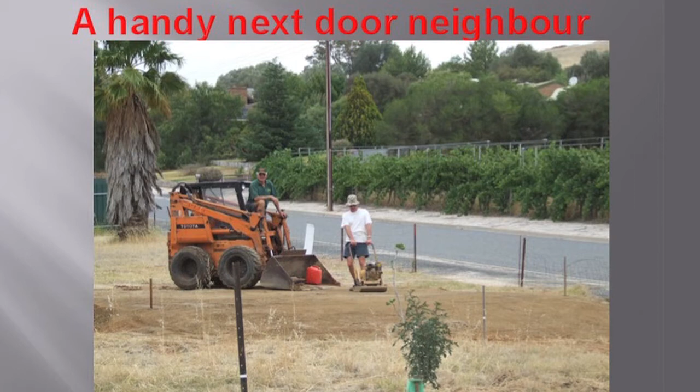I have a really good next door neighbour — that was the guy on the bobcat there, whose block of land it originally was, who we bought it off. And of course I've got a son called Warwick, who just happened to be outside that sign there, near the Central Markets, and sometimes comes to these events.

He's been really, really useful for me — he has given so much of his time, I could never pay him back for it. So if you've got a son it's definitely useful, or a daughter's probably good too, but somebody who's interested in learning, which he is, and it's been good for him too. I'm not saying it's just a one-way street — his knowledge of building has increased over the years, just as probably mine has as well.

So, August 2014, that's pretty much what it looks like at the moment. The only thing different is that flue stack is about one stack higher, because it was a bit close to that gutter.

Now, in the original brief, I knew a little bit about sustainable building. Being interested in permaculture for a long period of time, I had an understanding about north facing, good insulation, collecting water, and things like that. But over the last 10 years working at TAFE, and probably the last 3 or 4, my interest in sustainable building has grown because I teach in this subject as well. And of course, as I'm building at the same time, I'm interested in how things are going to be affected in the build.

It was somewhere in that period of time, probably back in about 2004, that I first read the book by Brenda and Robert Vale about the autonomous house. It's a fairly dry read, not scintillating, not full of colour pictures or anything. It's quite a dry read.

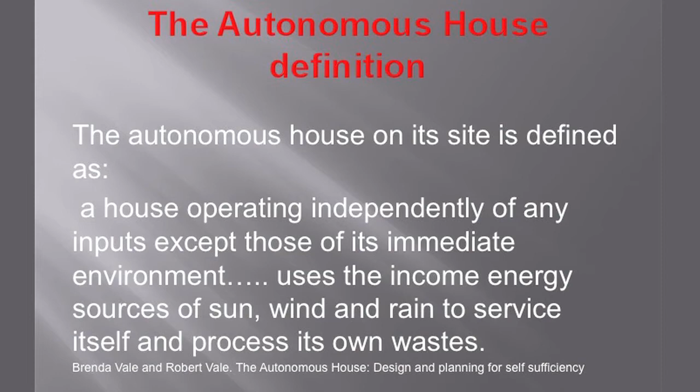But it opened up a new concept which I'd never really thought about. I'd always thought about the house as being sustainable, but when you think about it as autonomous, it's like a living thing that's self-supporting. I enjoy their book, probably more now than I did at the time, but it was a way of thinking about houses I'd never really considered before.

They were practitioners of it as well, both architects, and they built this house in Nottingham so they could see how it worked for them. All the things they were teaching as architects at the university, they put into practice in their own house. By and large, they accomplished pretty much all of what they wanted to do, with a few exceptions, but exceptions are always there for whatever we do.

This block of land that we purchased all those years ago was in Angaston in the Barossa Valley. It's just under 1 acre, about 3,800 square metres all around. When you see the photos, the nice thing is there are hills either side, so you get this extended view and don't really see the roads. It's still in the township, so there's town water and sewage connection there.

Because Penrice Road is the main road, we decided that's our actual address road. We were able to build the house furthest up to the back of the property, which was useful, and the first thing that went up was the shed to store all the stuff. The other thing it allowed us to do was twist it away from the road so we were facing exactly north.

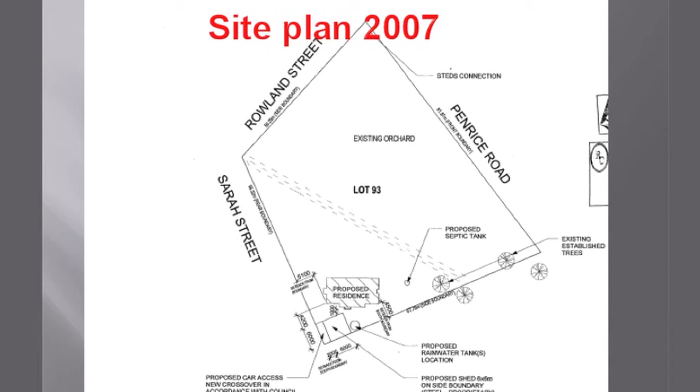If you can do that on any block, then you're off to a good start. By and large, having good orientation will save you much more money than having bad orientation. So that was Nearmap probably about 3 years ago.

Obviously had the roof on, so it might have been four years ago, can't remember now. So when I said that we went to the architect, it wasn't that we hadn't thought about what we wanted to build on this house. We had thought about it, and with me being the artist person, I'd come up with lots of different sketches, and we had a look at them and decided no, it wasn't really any good. Then we'd go back and have another look at another one.

So we came up with this design. Originally it was going to be quite a steep pitched house, and we were looking for a mezzanine area over the top of the 2 bedrooms, because we both had this romantic concept of mezzanine bedrooms. But as you get older and have to lean more, you probably lose that concept out of your drawings.

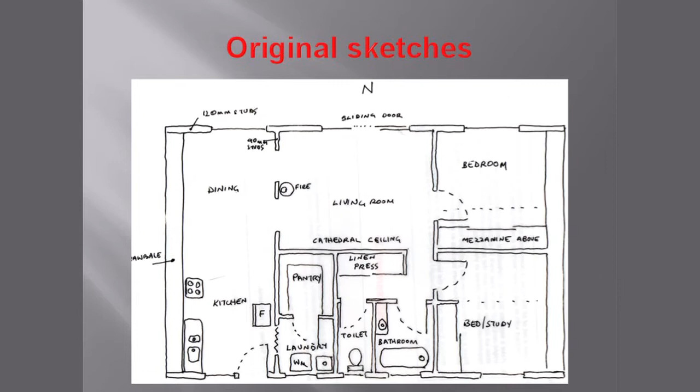But that was kind of what we came up with. It was pretty good. We'd always wanted a composting toilet, so even though it's drawn in there just like a toilet, it was probably always going to be a composting toilet to use. And so in 2004 we went to see the architects and gave them our sketches, and that's what the architect came up with.

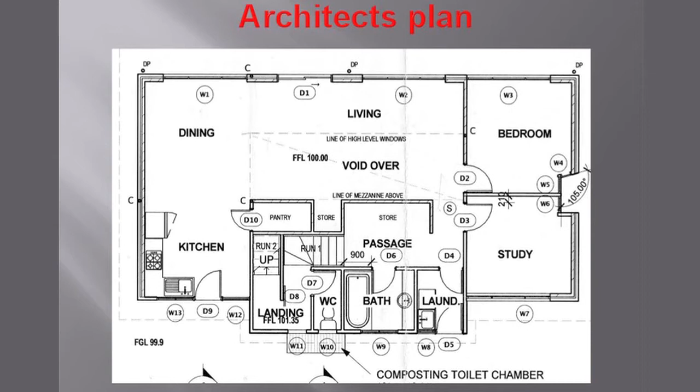Now I'll be honest, it wasn't a love affair with our architects. It wasn't one of those rosy experiences. It was not a long drawn out process, but it was not as fun a process as it could have been, I don't think. I don't know why that was, but it's just how it turned out. So that's why the architect's name is chopped off of that drawing.

Our architect, a well-known practice, had a junior architect do the drawings who came up with the idea of that area with a mezzanine over the top, hence what you see in the photo. Because of that, it opened things up. The composting toilet is on its own mezzanine, which was a good idea. The mezzanine above went from the pokey one under the eaves we were originally looking at to almost a room and a bit up top, which is okay.

It's quite a nice space, quite warm this time of year with the heater on. But by and large it didn't really change a lot from our original plan, just a couple of extra doors. One of the things you can see is the door that was drawn there, which was probably taken off my original drawing. I went over into the dining room instead, because I didn't see much point having the lounge room with another door in it.

So that was the architect's impression of it, with full height windows, which is one of the things we disagreed about in the end. I went for less height windows, which does reduce your solar gain, I won't deny that, but it also allows you to use a whole lot of wall space that you couldn't use otherwise.

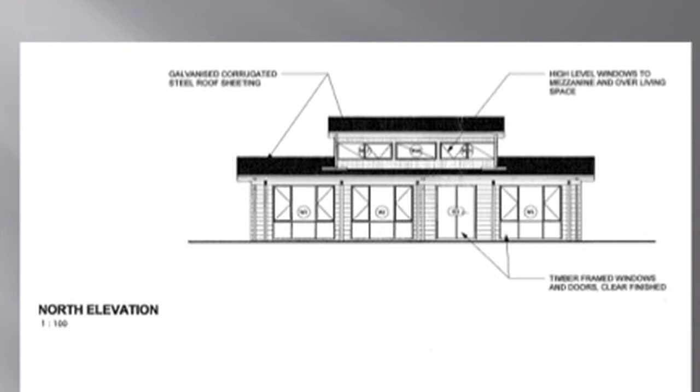Running energy programs on west-facing walls, if you have no windows on it, it just gives you the best scenario. As soon as you put windows in there, your energy rating goes down quite remarkably, even with expensive glass. So that was a cross-section with the composting toilet chamber, just to allow access to it.

So it's a Clivus Multrum size, and the mezzanine there.

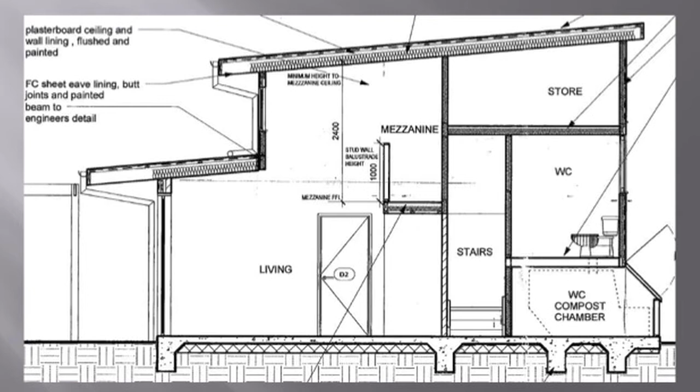So in summary, it's all the things of good passive design: north-facing, no west-facing windows, small windows on the southern side, most of them double glazed, and small on the eastern side with a little inlet alcove there. Good cross ventilation, both low to high and just through the house, because most of our wind is north-south.

We're at the top of a hill here, so where I'm standing there's a quarry right behind me, although you can't actually see it because there's a hill there. It seems to funnel the wind directly through or directly down, so it's really good for that.

And lots of insulation. For wall systems, originally the architect wanted reverse brick veneer, and I was quite happy with that. But then I learned more about reverse brick veneer, and it's good in certain parts of the house and not so good in others. So from a house that was completely reverse brick veneer to start with, it ended up being limited to pretty much the east and west walls, and everything else just got extra insulation.

So the original structure was just standard 90mm pine studs. Then when I decided to negate the brick veneer along those walls, I added another 70mm layer of studs with insulation as well. So insulation-wise it's about R4 in those walls, plus of course the weatherboard and plasterboard add a little bit more.

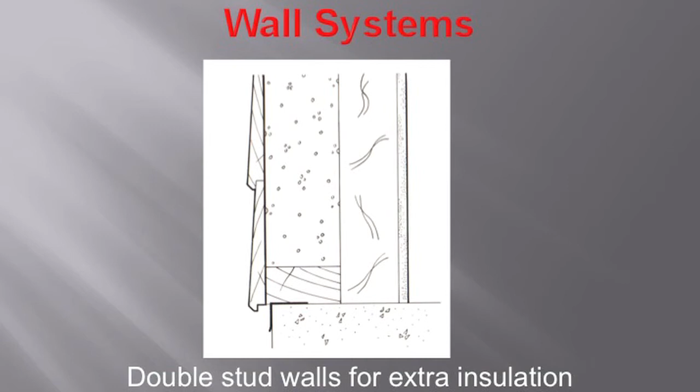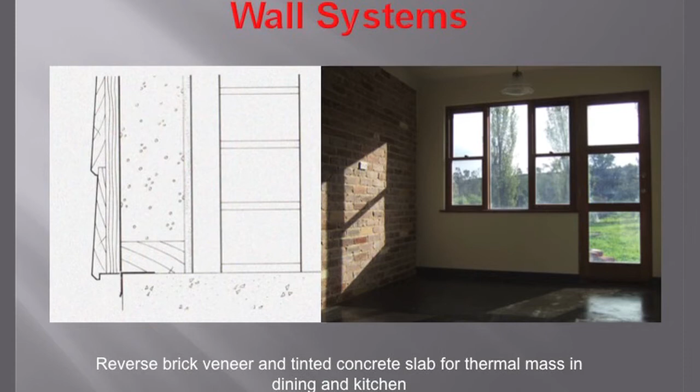And a reverse brick veneer with the concrete slab - that's not quite polished there, just got a bit of linseed oil on it at the moment, but it will be polished over the top. It's a really good absorber of heat for balancing out the temperature in your home. And of course if your slab is tinted it works even better. So when the original pour came, we just had a little bit of black oxide sprinkled over it.

That's the little alcove on the eastern side. As the builder of this house, that was a cursed thing to actually do - so much detailing, trying to get this little 900 by 600 space in there and detail it for the plasterboard.

And there's 2 windows in that space as well, which you can't see from this side. It does give you on that back bedroom, which is on the south side, a little bit of winter sun in the early morning in winter time. So it's probably worth it for that.

Now that was the southern side of the house, but since I took that photo, about a year and a half ago, I've got next door neighbours now who are much quicker at building their house and have almost completed theirs. But they probably didn't have as much fun as I had.

So that's the dining room. We only had the power put on about 4 or 5 weeks ago, which made it kind of habitable, so we've been staying up there on weekends since then. Because one thing composting toilets need is a perpetual fan to make them work, so when you haven't got power, it's pretty hard for that fan to buzz around.

The bathroom's quite small because the toilet's separate, so it was just big enough to get a bath in and a vanity unit, and a novel use of a set of stairs there, a set of steps.

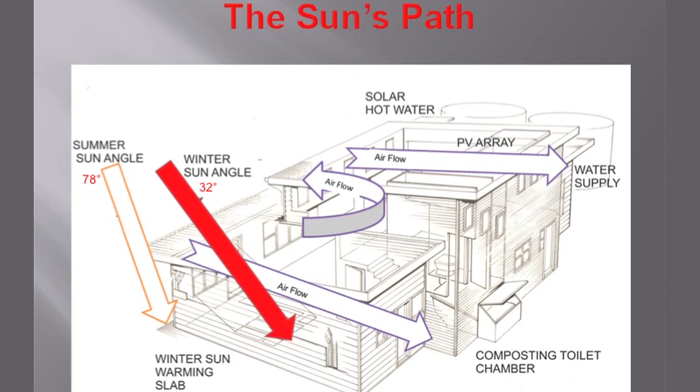But pretty much you can see that I get no summer sun probably until pretty much the equinox is starting to come through the windows.

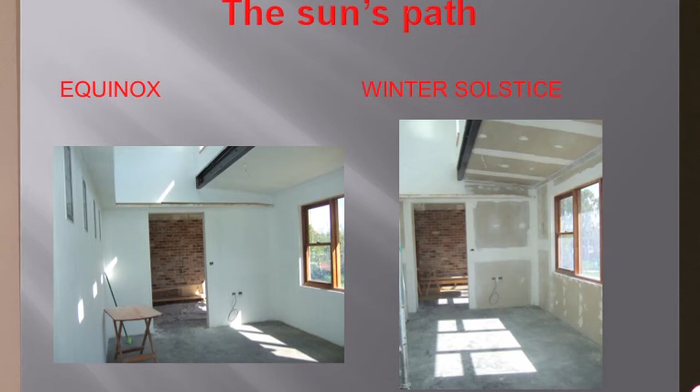So some of the other things about making a house more autonomous is having rainwater. Because we were only up there on weekends, I ended up with concrete rainwater tanks, which were quite expensive and probably not too environmentally friendly, but we've got 45,000 litres altogether. We have mains water to the house, but the rainwater tanks are now plumbed into the house at the moment.

But as part of my permaculture design, I was looking at strategies for getting water into the orchard as well. On the orchard side of the road, it sits probably about half a metre below the road, so there's a fair volume of water that comes through there.

Although we do have a creek that runs through there, it's a stormwater creek, so you can't really capture too much off of that. But I do have a plan for the future for that one.

The swales come into the orchard and recharge the subsoil, and you can see where the green area is in summertime of how much water goes into that.

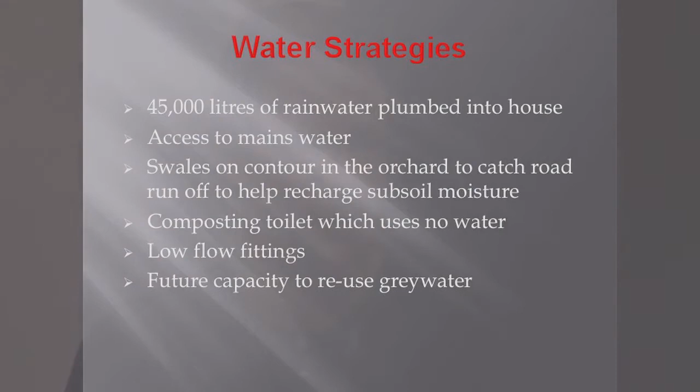And then in the house, composting toilet, which uses no water, and then low flow fittings. One of the compromises getting the composting toilet through the council was that originally I wanted a grey water leach field into the orchard, but they weren't very happy about that. So we agreed to disagree, and I said, well, mainly I'm after the composting toilet. The grey water, you have options of what you want to do with that in the future. So I said, okay, I'll agree to give you the grey water to help your STED system flow down to the sewage farm if you give me okay to have the composting toilet. And I was like, yes, got that one through.

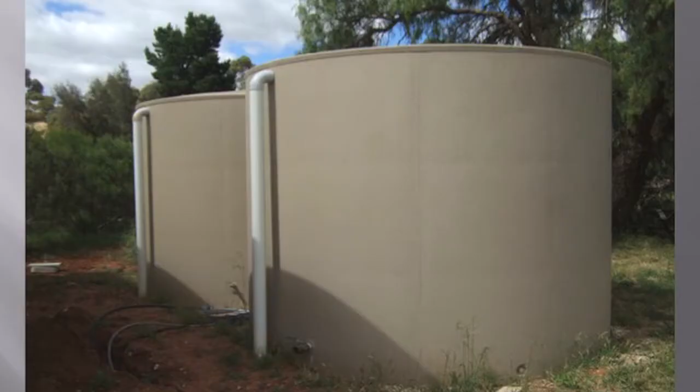And then of course you've got to deal with the Department of Health. They are very pro composting toilets, but you have this kind of back and forth ping pong match between them and the council. But it's in, so there's the water tanks, rain tanks.

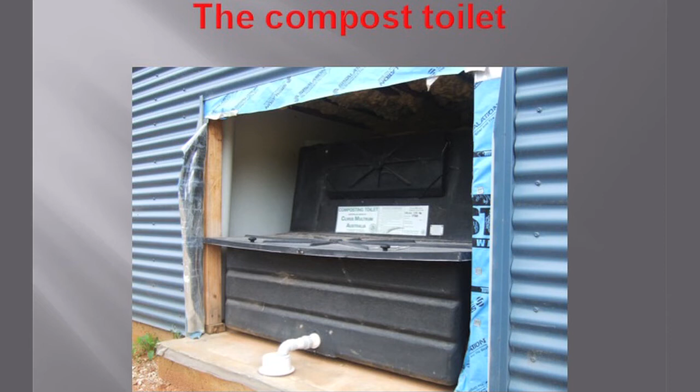That's what the composting toilet looks like in Australia. Some countries use fiberglass, but over here it's more of a plastic, quite thick, quite dense plastic. And it does have an overflow drain just in case you need it into the STED system, common system. That's what it looks like now, they still have to get some flashing on there. That is how they work if you've never seen one before.

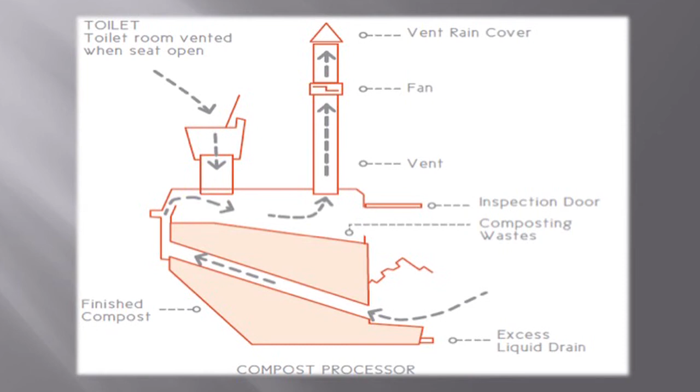Essentially they don't really compost, there's no real heat there. It's filled up, about two thirds of that container is filled up just with leaf mulch and compost. And then all that happens is the human waste feces just dries out on the top. Once it dries out, it doesn't create very much volume at all. In fact, humans are kind of like the worst in regards to volume. You wouldn't be able to fertilise very many gardens with human waste. You're much better off getting a cow or a horse.

But unfortunately, we flush it out to sea with many litres of water, so it looks like we have a big volume of waste. So for the insulation, it was just to building code originally, it was R3.5 or something in the ceiling.

So I went for, and summer and winter is different here, an R4 batt plus a reflective foil, which gives it an extra R2 in summertime, and it doesn't really matter that much in winter because it has to get through the R4 in the first place.

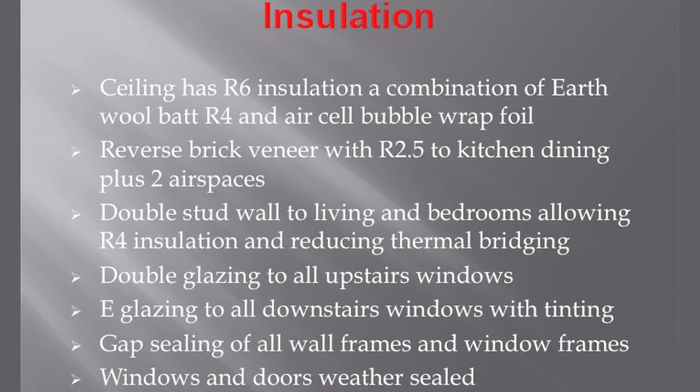The brick veneer walls have got R2.5, and for personal reasons we just decided to go for a spray foam around the whole exterior of the house, and that's worked out quite well. So that reverse brick veneer wall with the red bricks has got two air spaces plus plasterboard in between those two air spaces, plus the brickwork on the inside. Most of the rest of it has just got double studs with no air spaces, which gives an R4 insulation.

One of the things about learning how buildings go, when I first started this, it was double glazing or e-glazing. E-glazing was just relatively new in Australia, and I thought, oh, it's e-glazing, it must be good. So I got e-glazing to all of the downstairs windows and double glazing to all of the upstairs windows. Probably, if I had to do anything again, I probably would be thinking about changing some of that, but that's just how it goes, you're just kind of stuck with it.

And it has got a bit of a tint in the windows as well, so it's probably going to benefit more in summer than in winter. It's not that it's cold in winter, but it's probably coolish. But if climate change keeps going, I'll be winning there.

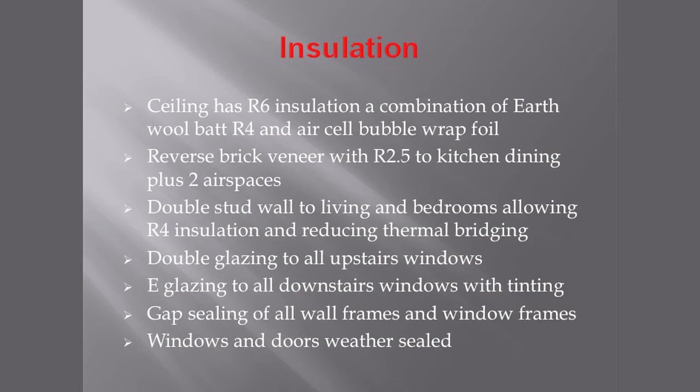One of the things that I got from the passive house movement was the sealing of frames and windows, which we do fairly poorly in Australia. So all of my stud work is sealed to the slab, and all of my windows are sealed to the stud-work, both with house wrap and also seals.

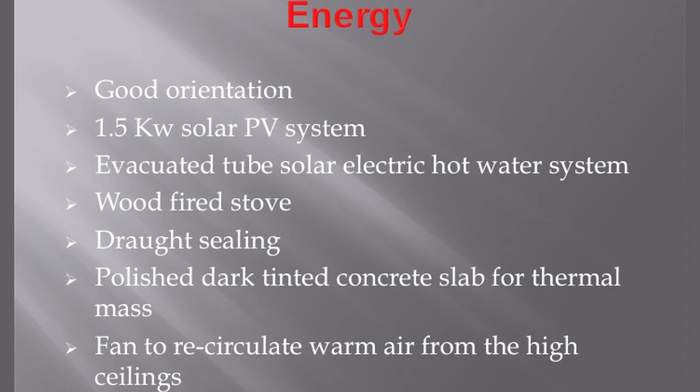So there's not going to be much air movement through that. I did get a 1.5 kilowatt PV system on there, that's on the shed, which you might have noticed - I can't remember whether you can see that or not. And an evacuated tube hot water system from Stratco's. The wood-fired stove was originally going to be part of it, but my plumber talked me out of it, so it isn't - it's just there as a heating and cooking unit.

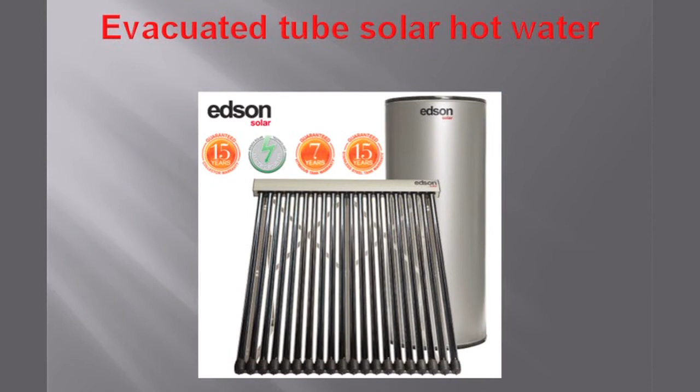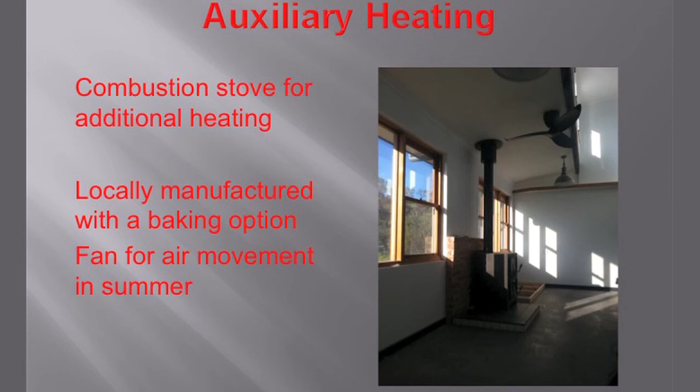So as for the land that surrounds this house, which is why the house kind of came out of the land - the orchard's probably got about 50 fruit trees. We've got this interplanted with leguminous trees such as Tagasaste and some acacia species. We've got vegetable gardens running through the rows, about 1.5 metres wide, running probably about 20 to 30 metres of vegetables.

And there are some swales on the orchard because occasionally you do get really heavy downpours. I was lucky enough to be up there one day when it gave us 24 mil in about 30 minutes, and it looked like, even though it's a sloping block, it looked like a lake. There's a small portion up the back of the block where I've got about 10 eucalypts, some a bit older than others, that I'm going to coppice for use in the fire.

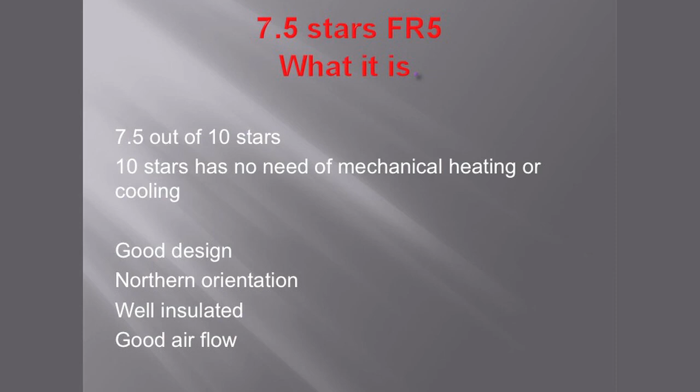When I ran this through First Rate 5, I originally got about 7.8 in the old program, but they tightened up the program and it dropped to 7.5. Theoretically, I always think if you get to about 7.5 to 10 stars, you probably have the option of whether you want to heat or cool it at all. So it looks at airflow, design, orientation, insulation, etc. That's what it physically looks like when you do a run off of it.

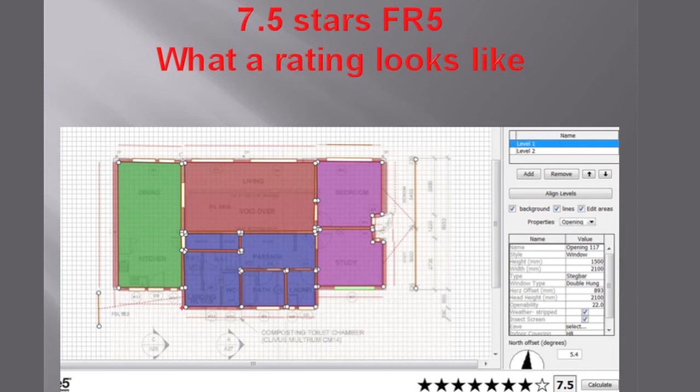And the weather data, which the First Rate 5 program uses, is the same as Mildura, which is kind of funny, but that's what they reckon it is. They've got 40 years of weather data that backs it up.

So, products used: we used cypress cladding for the exterior and colour bond. The cypress is a native Australian species which is white ant resistant. Just used pine studs from the hardware. Some of my interest in this was not so much - I was more interested in the product being available for most people. So most of my stuff came from hardwares except for that cedar.

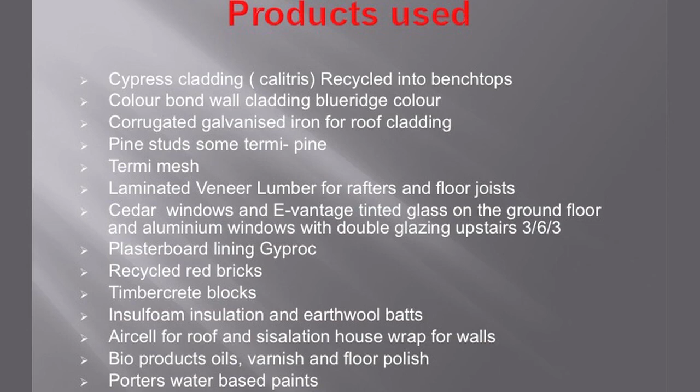Hardwares or local businesses - we used Termimesh, we used LVLs for pretty much everything supporting the roof structure, and Western Red Cedar windows for downstairs with e-glazing, then upstairs we used aluminium mainly for lower maintenance. Plasterboard was just Gyproc, and we used a combination - I don't think I had any shots of the eastern wall, but on the western wall it was just recycled brick from Little Red Brick Company. I had this moment where I thought I might use a whole heap of timbercrete blocks, but as nice as they are, they're extremely heavy to lug around. Then the spray foam was Insul Foam, and then Earthwool.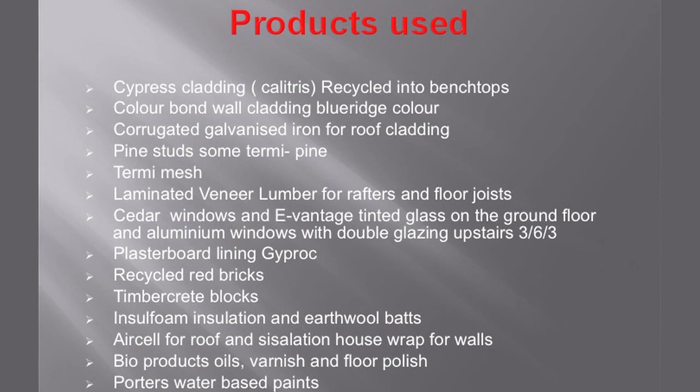Earthwool do have some credentials with their recycled glass batts, and for keeping the VOCs down with all the rest of it, we used Bio Products for the slab and for any timber work, interior and exterior, and Porter's water-based paints, which we get from - I think it's Paint Central on Dawes Road - supplied us with most of those. And that is about it.